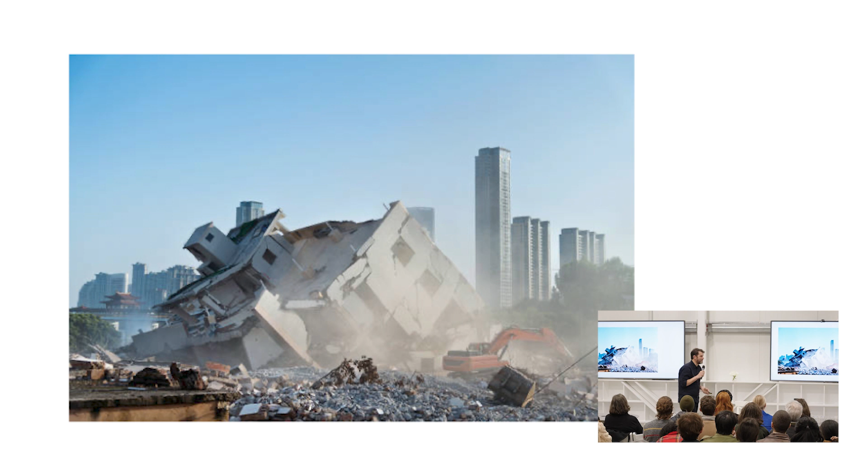You probably don't often hear engineers talking about morality. I think quite often we're facilitators for other people's visions, but I'm afraid I'm a little more opinionated than that. So we're going to talk about the social context of building design and engineering. People rather like engineers who design buildings that don't fall down. This is the primary driver for hiring an engineer to design anything. You might get an engineer because you want to be more economical with the material, make your building a bit more affordable. An emancipated engineer will combine art and physics to make structures really beautiful and lift your building. And after all, architecture is structure, or structure is architecture.

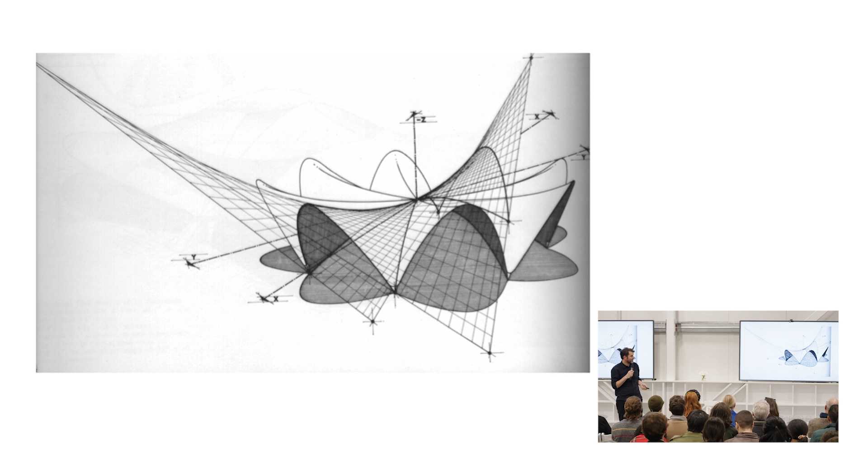But we try and think a bit further forward than that. What kind of employment are we creating when we're building buildings? Are we creating work for machines, or are we creating work for people? What kind of work are we creating? What kind of lives are we engendering by designing buildings the way that we design them?

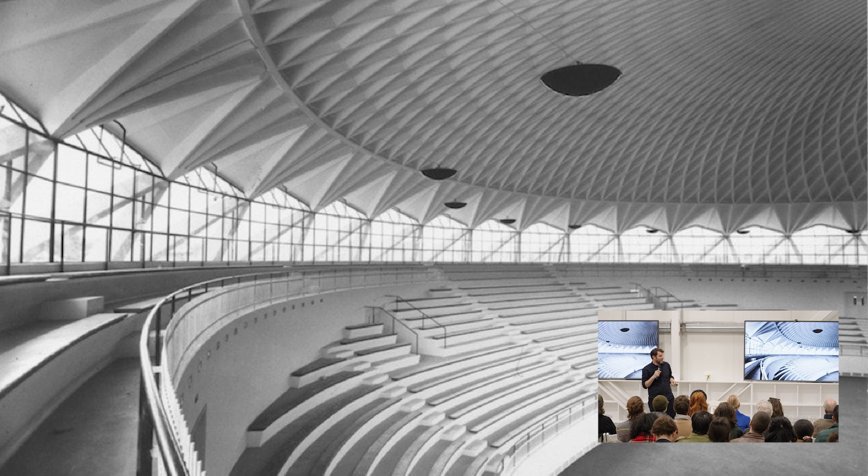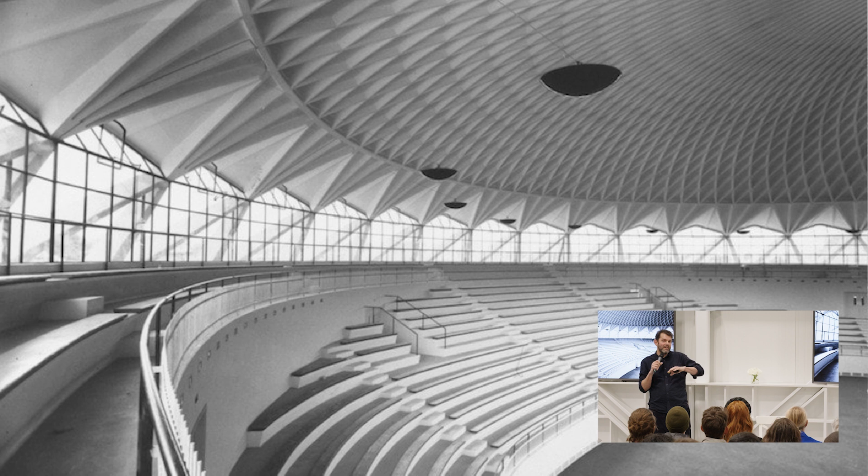In the 1950s, after the Second World War, there was a shortage of coal generally, and manpower was cheap and material was very expensive. So the kind of structure that this engendered, in this case from Luigi Nervi or Felix Candela in South America, Eladio Dieste in Uruguay, structures that are very highly designed, spending a lot of time designing them, a lot of time building formwork to minimize the amount of material.

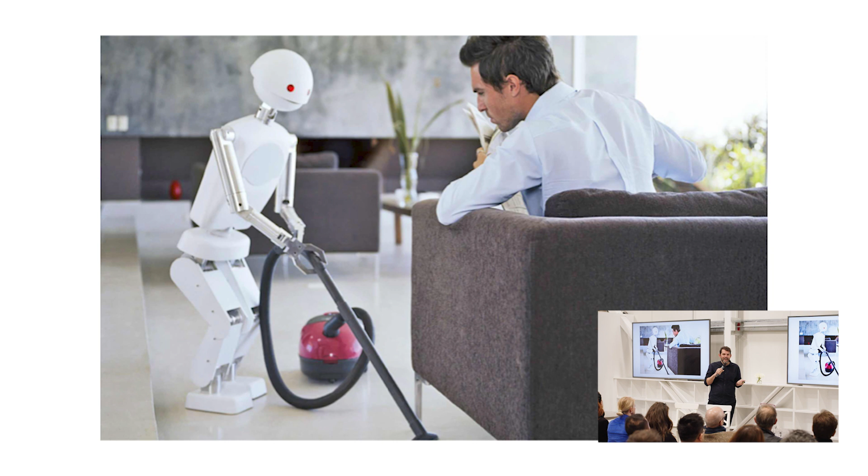We were kind of interested to think about the impact that income tax has on this equation. So you tax employment and you tax labor and design. You don't really tax material and machines. So in our society, we tend to over-rationalize, minimize design, minimize carpentry, formwork, and just chuck lots of concrete and steel at problems. CNC, everybody loves CNC. It's the future. Robots are going to make our lives absolutely amazing, but they're probably not going to make the lives of the people who used to do those jobs amazing. There'll be a lot of people languishing on universal income as a consequence. So how do we make decisions in the way we build that are good for society?

The construction industry at the moment is deeply steeped in the fossil fuel era. All of the materials we use, steel, glass, concrete, brick, they all come from coal-fired processes, and they use unimaginable amounts of energy compared to any amount of energy that was used before.

So when we're practicing, we design, in our practice, lots of steel and concrete buildings all the time, but we try to offer alternatives that we think are socially better than the ones that we normally use. And people say, how do you evaluate this? How can you understand what materials have high carbon or what materials don't have high carbon? There are lots of spreadsheets and websites to work this kind of thing out.

But for me, it's very simple. If there's fire in the process, then clearly it's a high carbon material. If there isn't fire in the process, then it isn't. So we're pushing generally to build more with timber and more with stone.

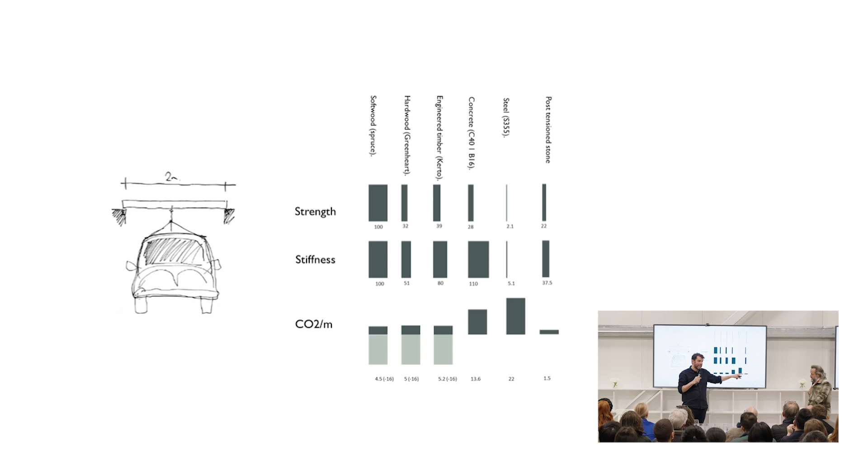These are the sections that have the same stiffness. These are the carbon footprints per meter of those beams. So it's about 22 kilos of CO2 per meter for the tiny sliver of steel, 14 for the concrete, 5 for the timber, and minus 16 if you consider the sequestered carbon in the timber, only 1.5 for the stone. And the reason is the stone is very strong. It comes straight out of the ground and it's already made.

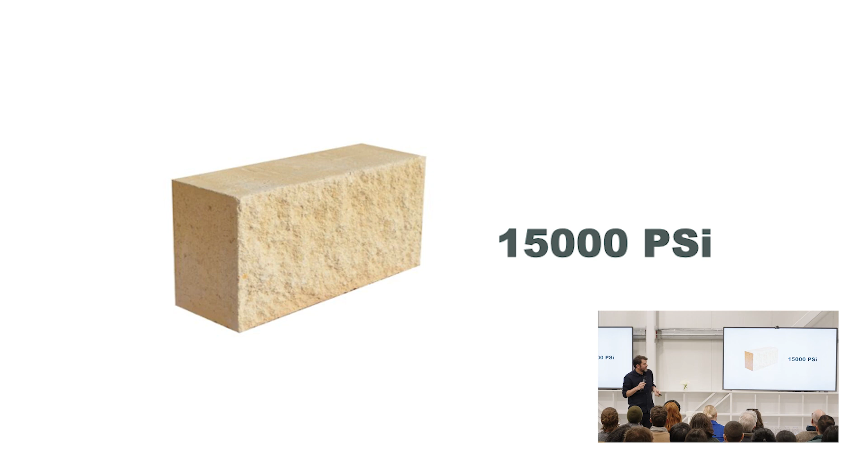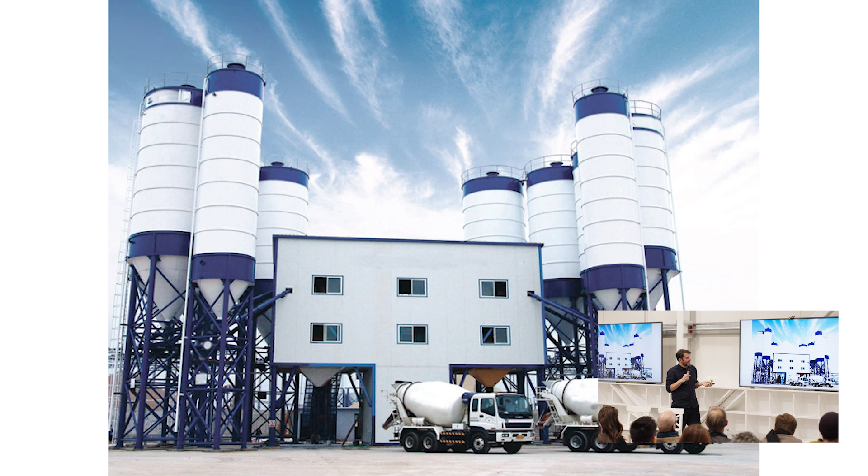We, in our incredible construction industry, take 15,000 PSI limestone, we crush it up, we get a lot of gas, we burn it, not only releasing the carbon from the gas, but releasing the carbon from the chemical process of making cement. We get fresh water and sharp sand, both of which are in short supply. We put up formwork, reinforcement, backpropping, vibration, releasing agent. 28 days later, we have a piece of concrete with a strength of 4,000 PSI. So we've thrown all these industrial processes at this piece of material, and we've rendered it with 1/5 of the strength that it had in the first place, which to me at least seems a little perverse.

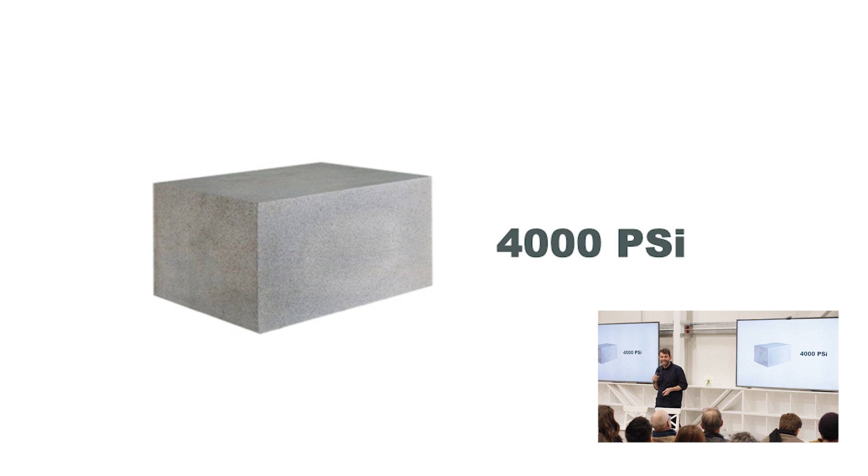There are probably historical reasons for that. People question, is stone sustainable? It's going to run out. Somebody asked me what's going to happen when all the stone runs out.

So we're going to be floating around the sun in office buildings and the earth will be completely consumed. Actually, impossible. 7 billion people having a chunk of stone this big is a 40 kilometer by 40 kilometer by 20 meter deep quarry. So the earth's crust has unimaginable infinite volumes of stone. And if you ever got close to exhausting the stone, a lot of new stone would come bubbling up out of the ground in its place almost immediately.

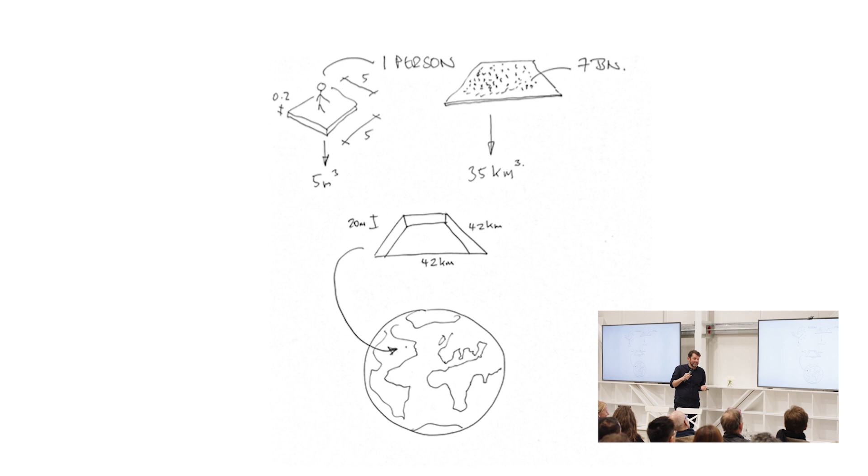So in some ways, we're harvesting geothermal energy to make a building material. The default solution to decarbonization of building is timber, and we were interested in land use. So the UK, obviously, we have very little land, and we like to build. Where are we going to grow all these trees?

So this is a tree, has about 1.5 cubic meters of material with, God knows what, 7.5 newtons per millimeter squared, which is pounds per something - maybe that can help, maybe he's bilingual in the units - but a small quantity of a very weak material over a 25-year period. So the tree takes a long time. Underneath the tree, 500 cubic meters of 150 newton material, much stronger, in about 3 months.

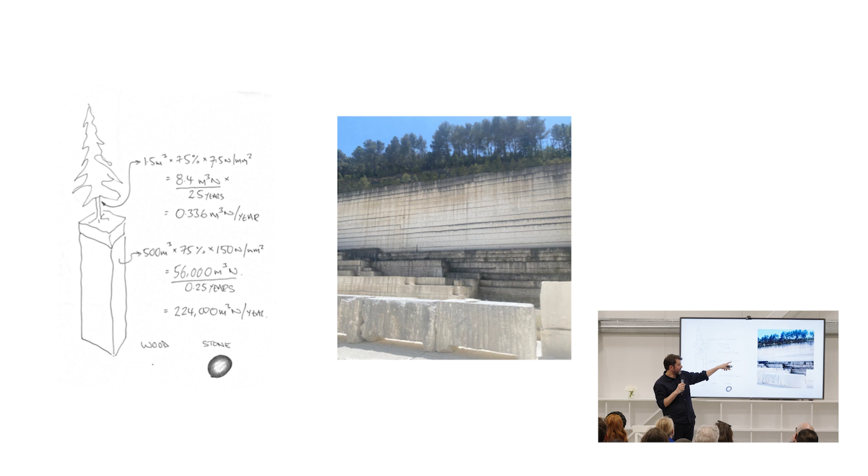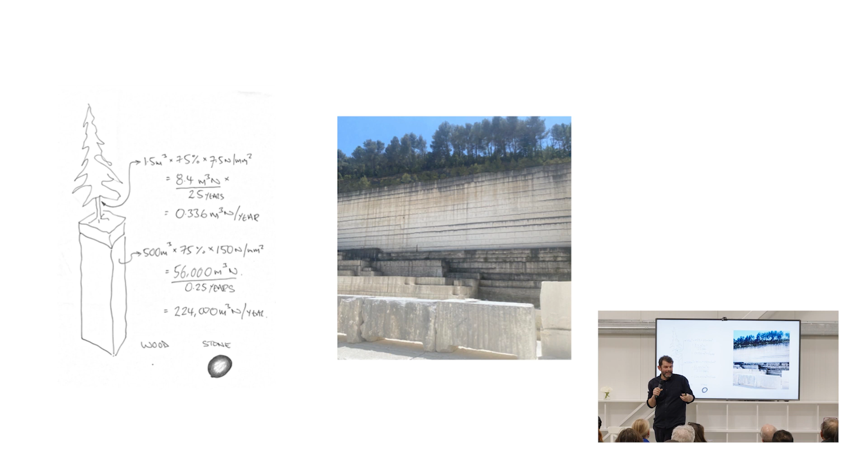And you can see this is the Estaillades quarry in the south of France. That quarrying is going to get you a lot more material than growing a tree on the surface, acre for acre. Stone is, as I said, much stronger than concrete in compression.

It's also stronger in tension, and it's also stiffer. So when concrete sets, it's got a lot of water inside. The water evaporates, and when you compress the concrete, you expel the water, so it has long-term shrinkage and creep behaviors that stone doesn't have. And because stone's stronger in tension, it doesn't need as many stirrups, links, and other kinds of reinforcement. So it's by far a superior material to concrete.

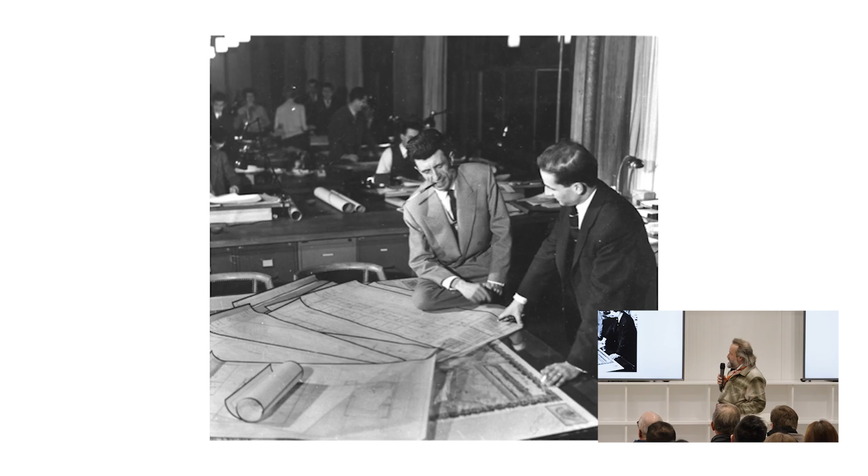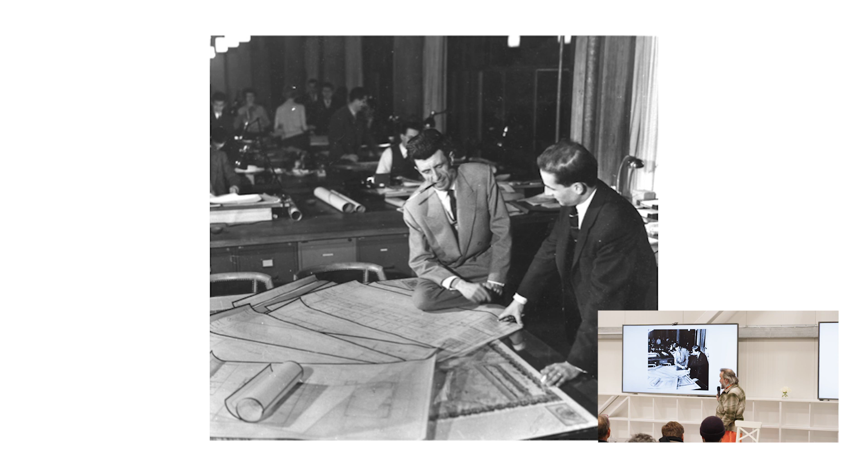So this handsome French architect is Fernand Pouillon. In the 1950s in France, straight after the war, 1945, France was on its knees. Most of the steel, most of the concrete had been used to reinforce the Atlantic coast. Our coal furnaces were just not working at all. If you wanted to bring some steel from Marseille to Paris, it could take you two weeks because the trains were not working anymore, bridges had been blown. And to reconstruct France with affordable housing, you need a material that you could get quickly and cheaply. And Fernand Pouillon decided to come up with the idea of rebuilding France with something we have a lot of, which is not genius, but stone.

Now you are going to do the conversion because I'm the stonemason, I don't do numbers. In the 1950s, the French government commissioned a study on the use of energy to see how we could build as quickly as possible. For 1 cubic meter of concrete, you needed more or less 225 kilos of coal—500 pounds. And to do exactly the same for a cubic meter of stone, you just needed 10 kilos. So quite a big difference in the use of the material.

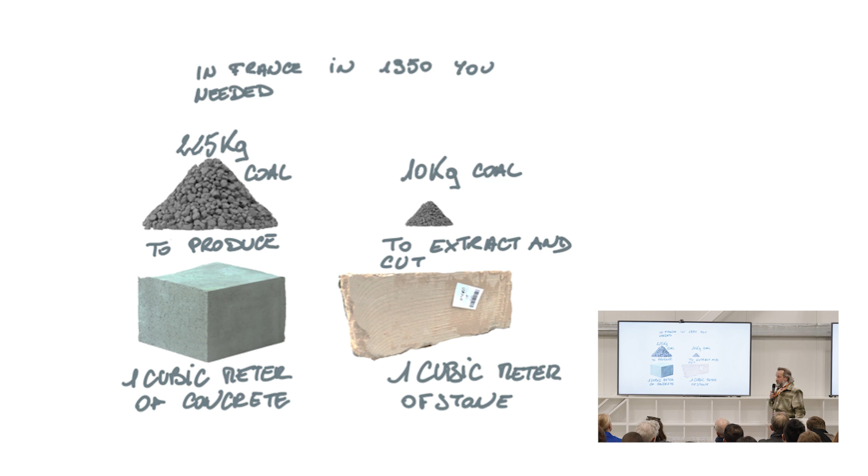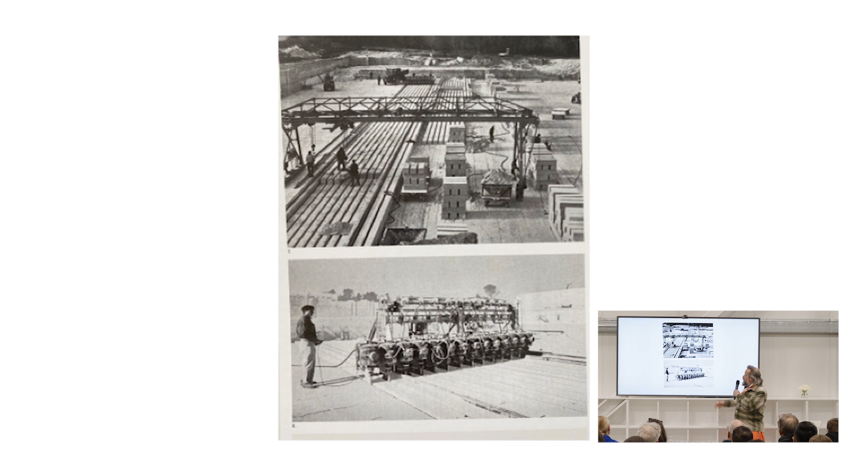So the French government, with some of the money from the Marshall Plan from America, was able to develop a new industry, a new stone industry based on heavy mechanized quarrying. Those quarries—if you were an architect building in Bordeaux or in Paris, you would have used the module that was available in that quarry, making the quarry work as much as possible. So the module was going to be different from the east to the west, to the north and south.

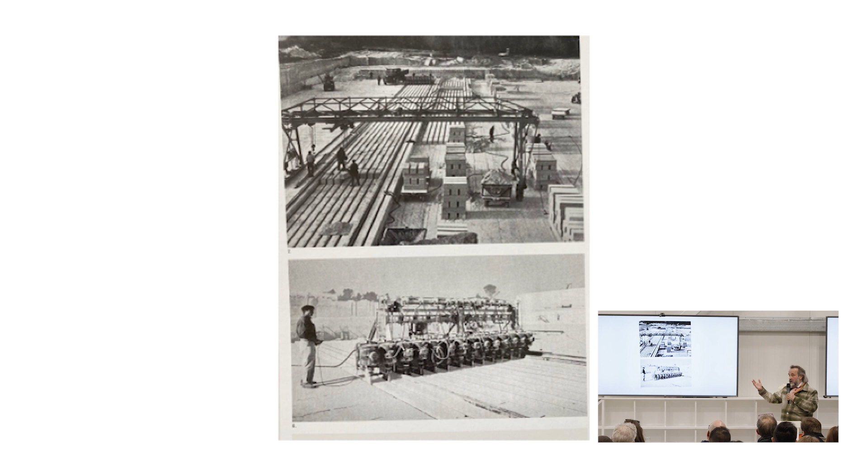Thank you. And Fernand Pouillon built those affordable housing projects—not Fernand Pouillon only, but many other French architects all over France, from 1950 to 1970. And it really, when we said it was the austerity—it's in England in the last 13 years, we had an austerity economy. And in fact, when you look at the two conditions, 1950s and now in England, you've got this age where energy has become more and more expensive, and the labor force a lot less affordable.

Sorry, if you can go one back, please. Thank you, you can go forward and back. Jesus, fantastic.

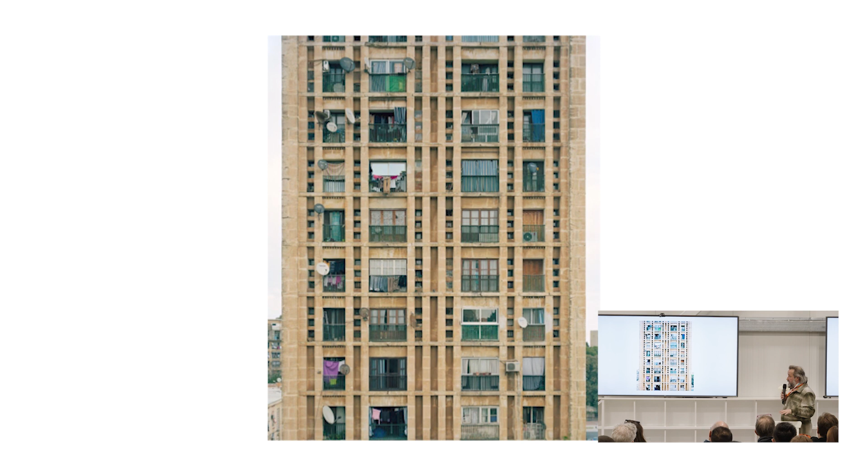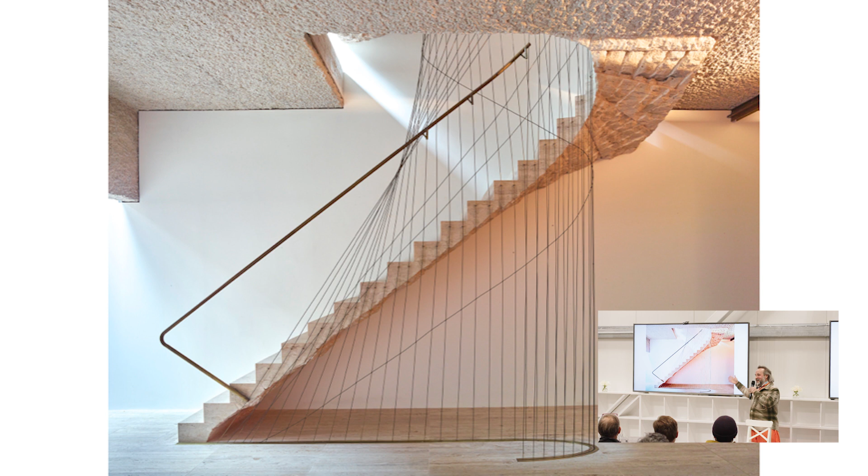We do staircases. So when Pierre and I met, Pierre was selling traditional stone staircases, and this is quite a traditional stone staircase. These staircases are typical all over Italy and Europe, and probably here as well. One stone sits on top of the stone underneath. We call them cantilever stairs, though they don't actually cantilever. The load trickles from tread to tread, and because the treads are fixed to the wall in the background, they stand up.

So we started to design those kinds of staircases, but Pierre could only sell flights of stairs to people who had a wall next to the stair. So we began to experiment with how we could design free-spanning stairs.

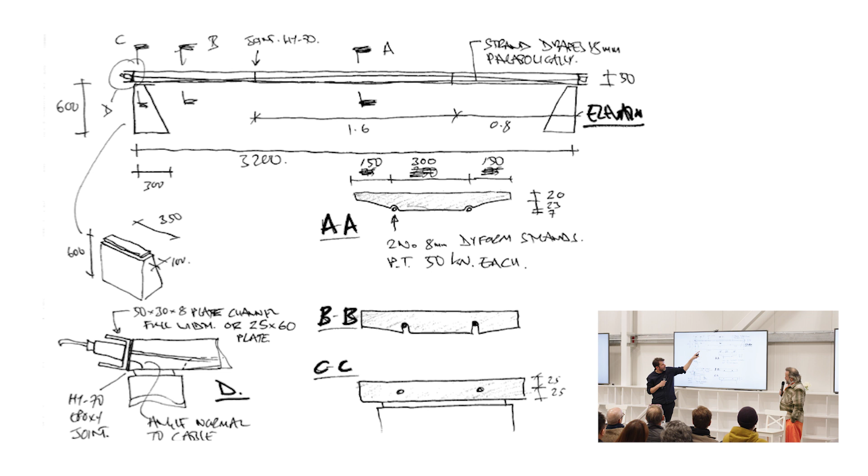This is an early prototype of a cable-stressed stone beam, 2 inches deep, 10 foot long, with 2 8 mm cables running through with 5 tons of pre-stress. The cables curve so that when they're stressed, they lift the weight of the stone and push the stones together end on end. We were better at designing stone beams than taking photographs, unfortunately, and now that thing is in the skip.

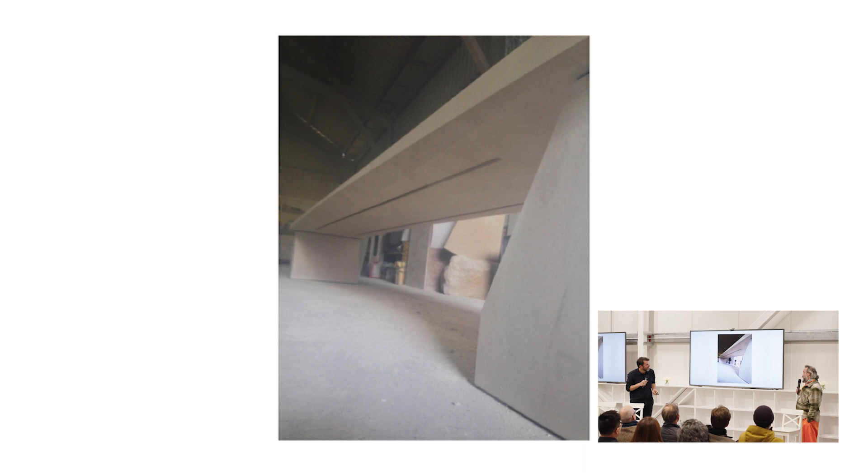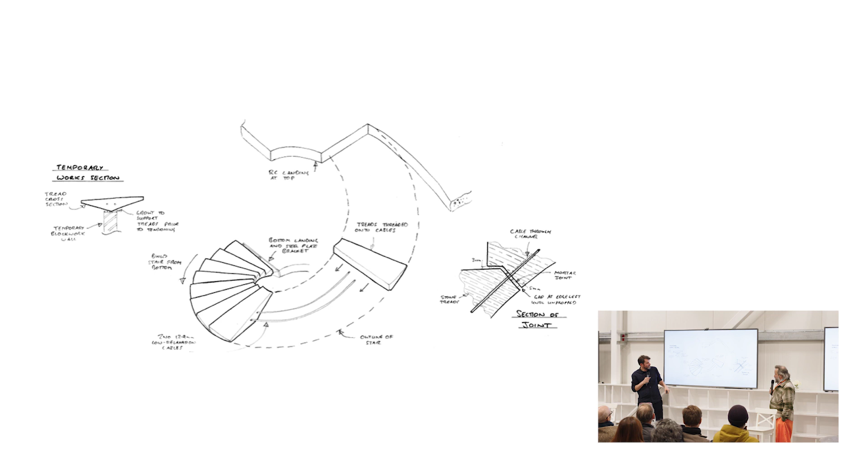We didn't have the budget, but we worked through and started designing, first of all, short, straight spans of staircases, then slightly curved helical spans, and then big helixes. It's a very succinct and simple solution - each tread is an individual stone, and the cables go through the middle and jam them together so we're able to make these structures. We did some prototyping, screwed it up, and eventually figured it out.

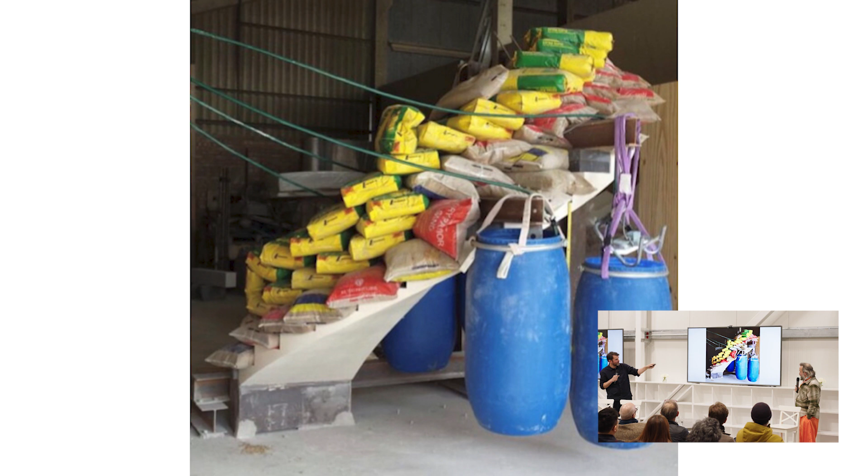This is Pierre's torture chamber for a staircase - the blue things are full of water. This was the first really big helical stair that we designed.

Again, you can see that it's shallow. The typical solution to this is to build a concrete stair or a steel stair and overclad it in stone. But you can imagine how many additional activities are involved in doing that, and how much additional cutting.

So I'm hesitating because I think we're out of order, aren't we? No, it's still good. Well, I'm not listening to you anymore, but it seems like I listen, no. Just you talk now. Okay. That's not mine, that's yours still. Yeah, still yours. Okay, so don't wake me up.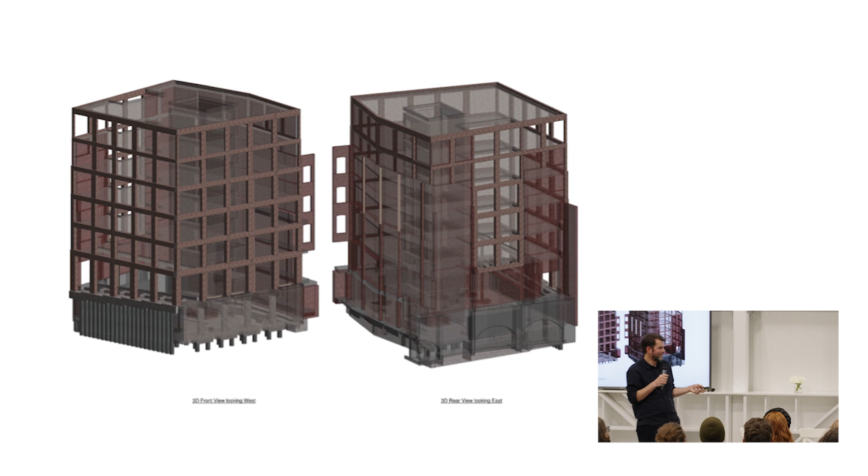People want audacious structures, but what we really want to do is build buildings. I wasn't out of order, sorry. Yeah, it's okay, I still know the building, so that's fine.

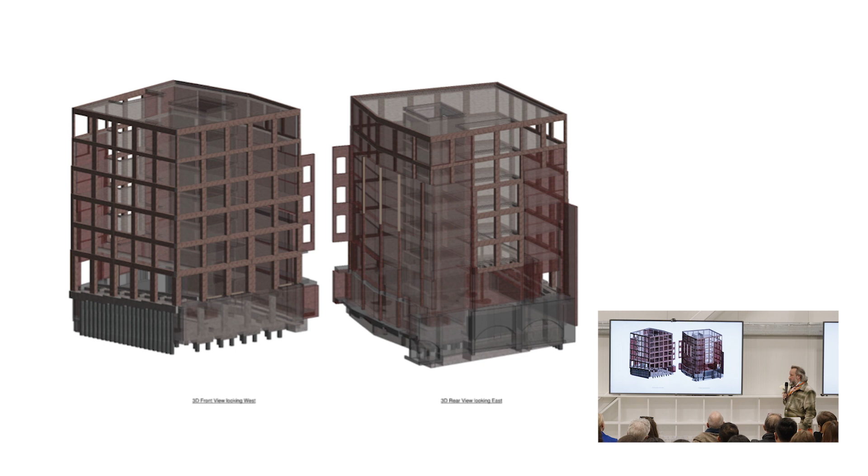So in 2016, you both sent us a commission to build a stone staircase made of solid stone blocks. It was going to be a brick building, but Amin decided to look into a more efficient way of building, using sustainable material like stone.

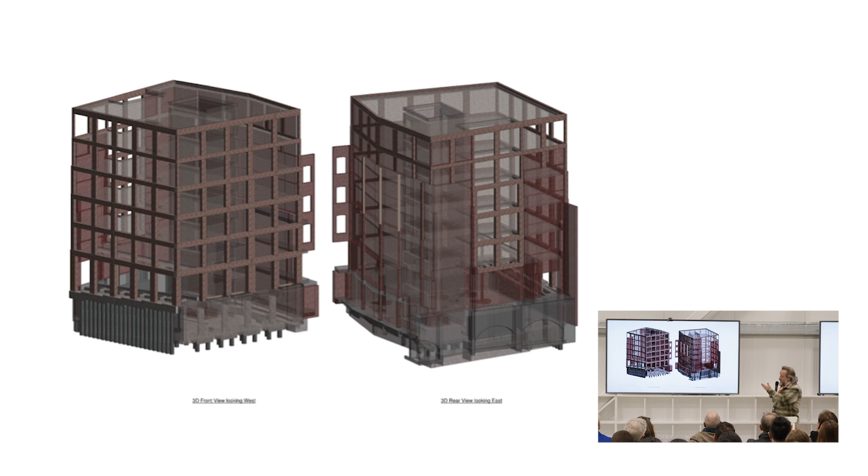Yes, so the system was an exoskeleton made of a succession of columns and beams which were attached by a connection box to the concrete floor. Do you want to explain the way it was built with the concrete floor, Steve?

So if the subcontractor was the same person building the stone as building the concrete, they would coordinate themselves and share hook time on the crane, and it would be really easy. But they're obviously not - you have stonemasons and concrete contractors. So in this case, we built the building's concrete frame on temporary propping. We left the temporary propping in and then built the stone afterwards, then took the temporary propping out at the end, so that you can separate the two activities and reduce conflicts on site.

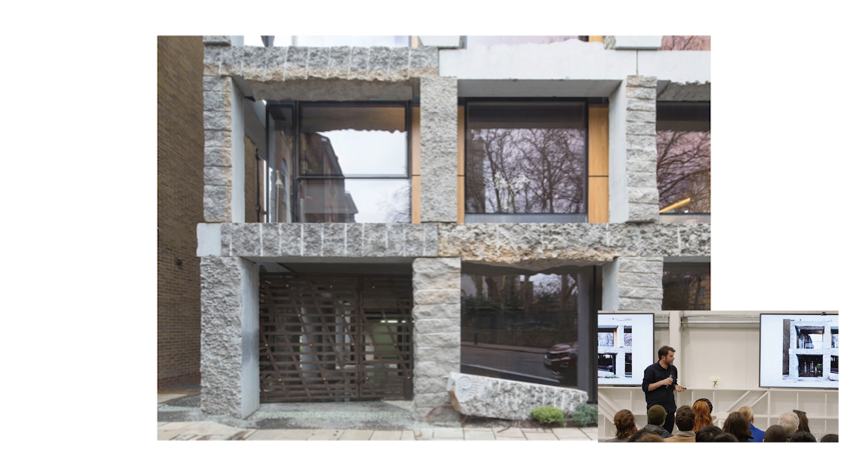Working on the same philosophy as Fernand Pouillon, Amin Taha decided to go for a very honest and raw finish to the stone. Again, to simplify the finishes and make the stone a lot more affordable, he decided to go for how the stone gets out of the quarry - so split, or just the raw crust of stone.

I think on the next slide we can see it. Maybe the next one, yeah. And you can see here that he decided to leave some what we call a sawn face, which has been cut by our big saws.

Again, this exercise was about economy of energy and efficiency. I think the next one... Okay, that's yours now. So what else can we make?

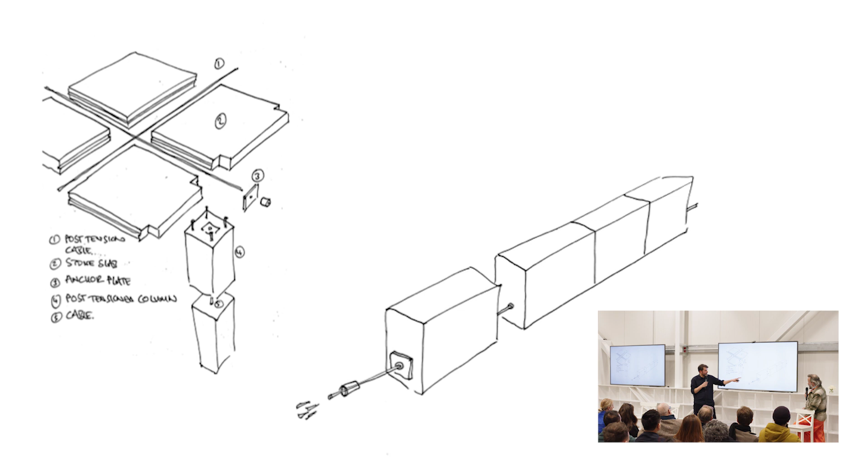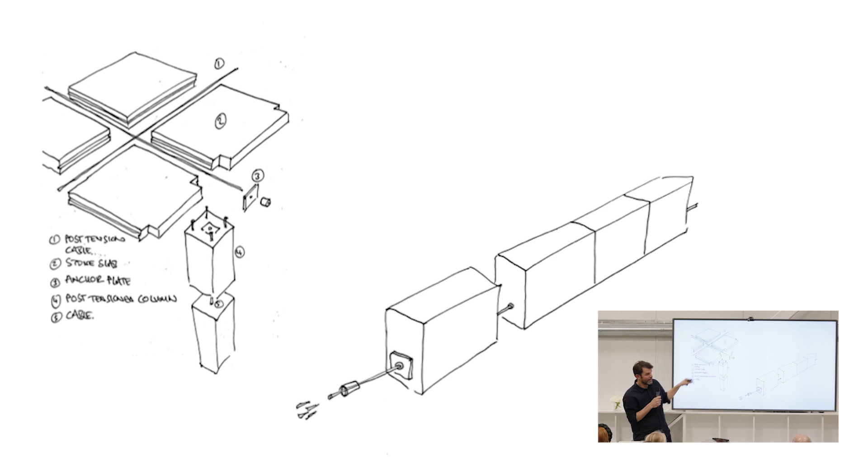The stairs are really complicated and very difficult to analyze, but simple beams and columns are very easy to analyze, and these are building components we can use anywhere. So we make standardized rectangular blocks, drill a hole through the middle, put a cable through the hole, use a cuff and wedges to hold the cable at tension, put it through with a jack, and make a beam. We can do the same thing with stone to make columns, and use stone plates with cables in between to make slabs. So you can make very simple building components with stone.

We have an R&D program in our company with an annual budget of about $1.50, increased to $2 since last week—we hit a big time. So we've been doing lots of improvised tests with Pierre and his team. Wendell in the middle is the head of special structures at University College London, and we're testing the beams for strength.

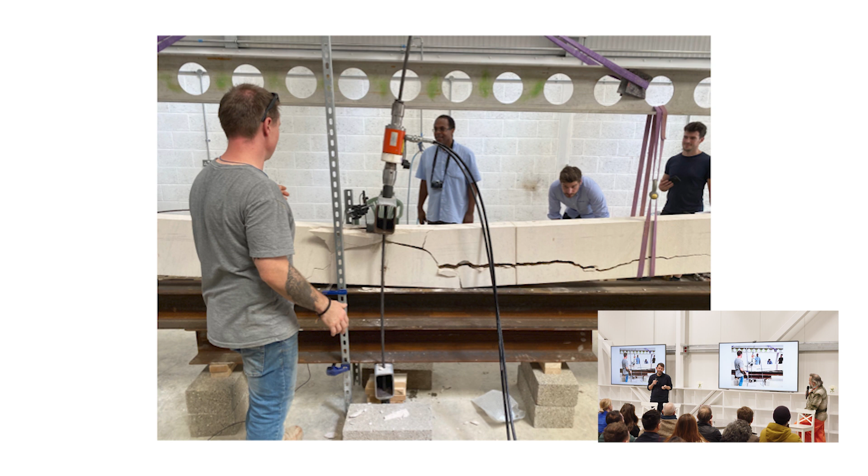Because concrete has water in it, when the water reaches boiling point it turns to steam and explosively spalls the concrete, exposing the rebar which melts and the beam falls down. You didn't get that with stone—it just sat there passively, and we got 3 hours of fire resistance from this beam in a 1,000-degree furnace. Very effective.

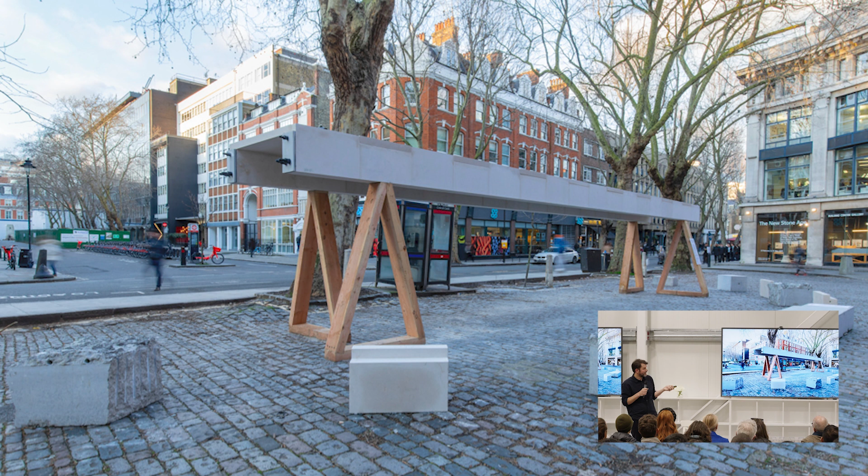This is not the first exhibition we've done. We did one at the Building Centre in London called the New Stone Age, and we were talking to a commercial developer in London about what they'd need for building components. They're building trading floors and saying they want 12-meter column-free spans, which I don't know what for. When you walk into a trading office, there's loads of meeting rooms and desks and that kind of stuff—I don't know why they need column-free.

Column-free is really bad for the environment—it takes a lot of energy. I think they clear the desks away and go roller skating at weekends or something. But anyway, this is a 12-meter span, 450 deep—1.5 foot deep, 8 inches wide—with 2 half-inch cables running through, and a 3-inch stone slab on top. So it's a useful, very simple building component.

This one you have behind you, so I don't need to point at it. Here we're trying to invoke a standard concrete T-section. What we have at the ends is recycled granite, recovered from a Pomo building. Granite's much stronger than limestone, so we're using it at the points of high stress.

In between is Portland roach bed. Portland is quite an expensive stone in the UK, but nobody wants the roach bed because it's kind of ugly and not the right color. So we got— Whoa! What do you mean ugly? Okay, that's limestone—beautiful, but people can't... Thank you, thank you, don't be judgmental like that. Stop heckling, it's not ugly.

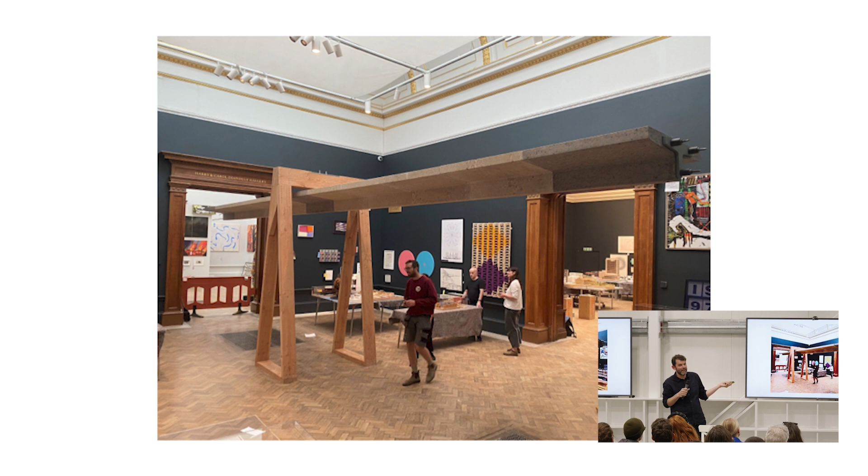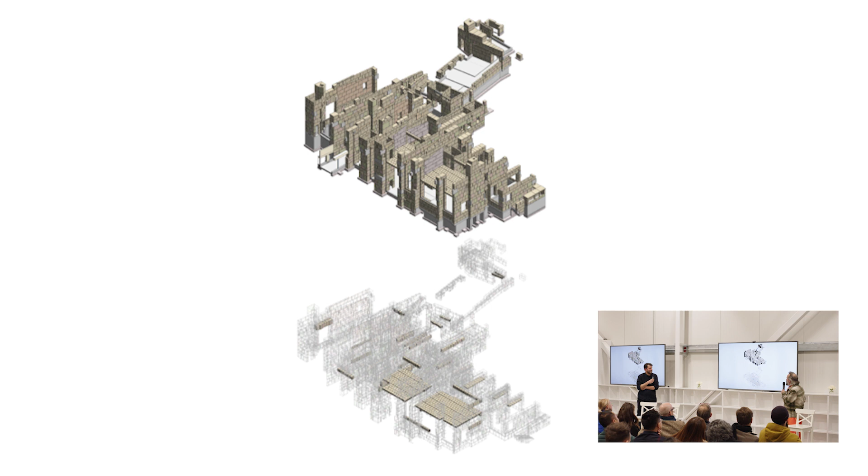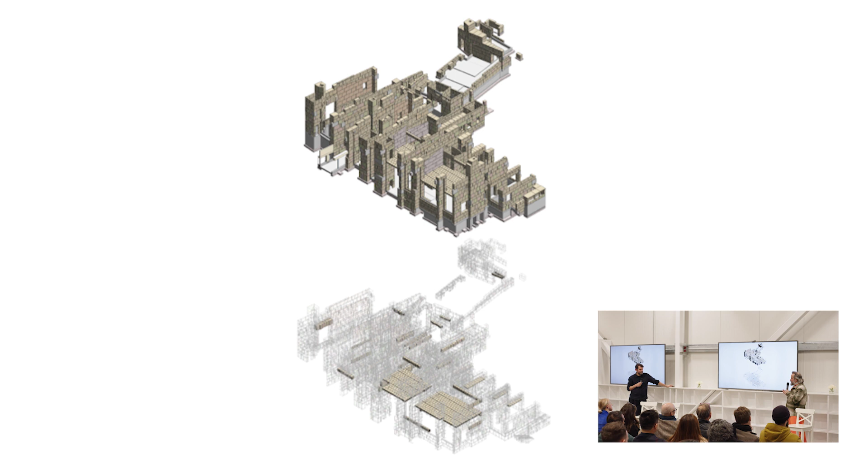Two years ago, we were commissioned to build a 3,000 square meter private house in England, and the aim was to be as sustainable as possible. The client wanted to use as little concrete as possible, and two materials came straight away—two materials that could be easily scalable in their use: CLT and stone.

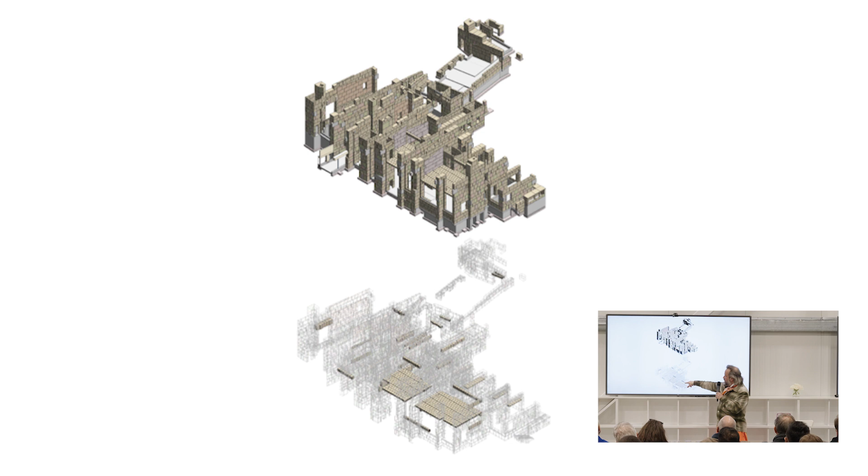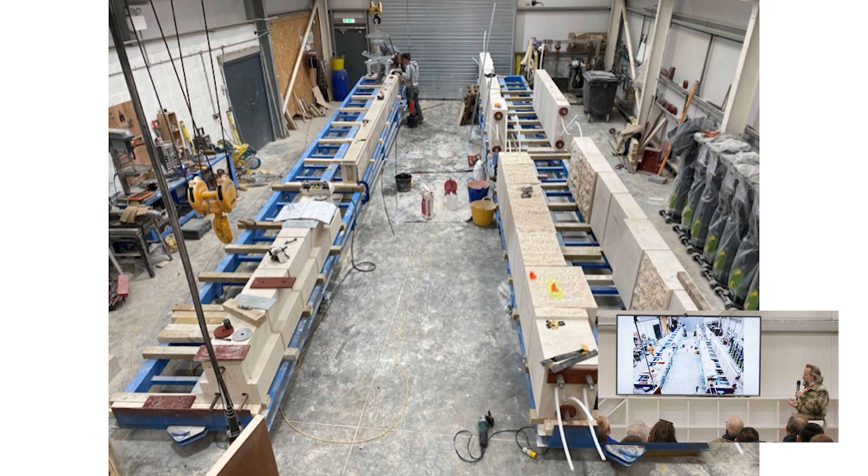Again, using the principle of large pattern stone modules to speed up the fitting process, but also including what we've been developing for the last 10 years—pre-stressed stone beams done off-site in our workshop, as shown in this transparent visualization. Here you can see one of our assembly lines where we produce such beams. We're trying to speed up the fitting process, much like the precast concrete industry.

Even architects in France now sell stone as natural concrete, just to make it a bit sexier.

The fact that a lot more finishes can be applied to stone. You've got split, you've got just left raw from the saw.

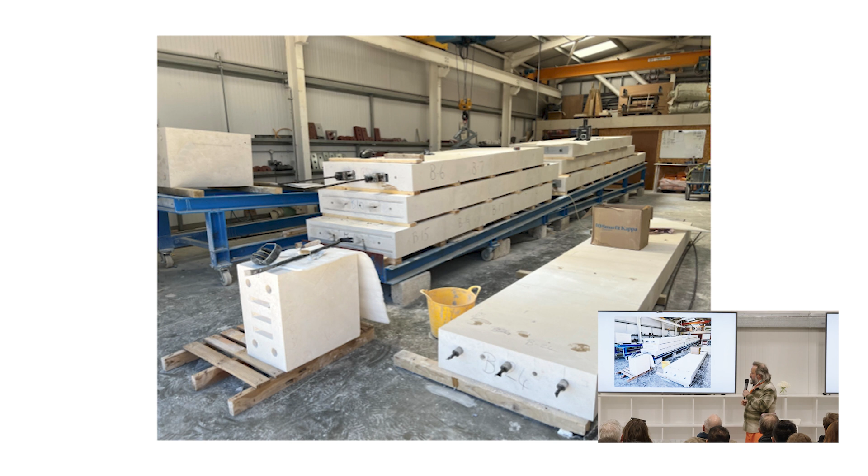The fact that we can produce pre-assembled elements means that on site the main contractor is less reluctant, because if you start to bring 30 stonemasons to fix one stone at a time, it's problematic for the logistics and strategy of building. Here you see some of the stone floor, with some of our cables that are used here.

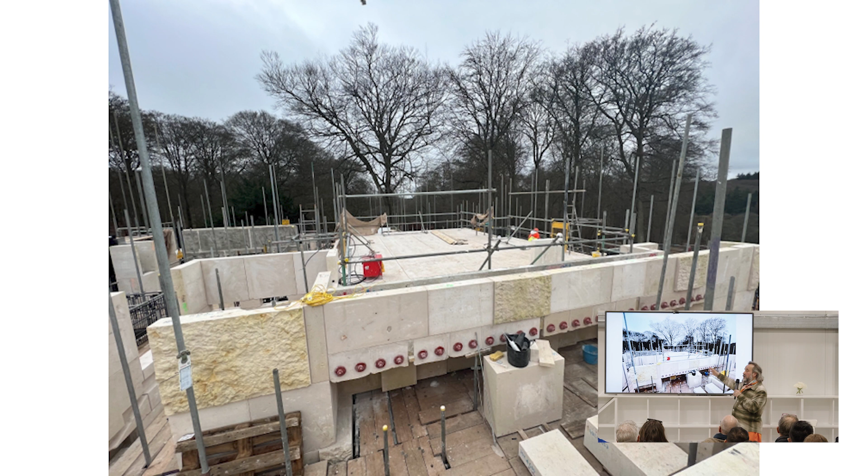And here you can see we've got a large area - I don't know how much fits in it, that's why I'm describing it as a large area. In stone, you can see the succession of stone slabs. They've been pre-tensioned, and here the whole floor - I do believe it's the first one in the world - this floor is all in pre-stressed stone.

So we're looking at other ideas and ways of using stone. In European culture, stone tends to be funicular, so we tend to use it always in compression, and it's never really used in tension. But in Indian culture and other Asian cultures, it's much more common to use it in bending and actually use the stone in tension, which we found very interesting.

So we were asked to do an exhibit for the Victoria and Albert Museum in London to look at an engineering principle, and we came up with this idea.

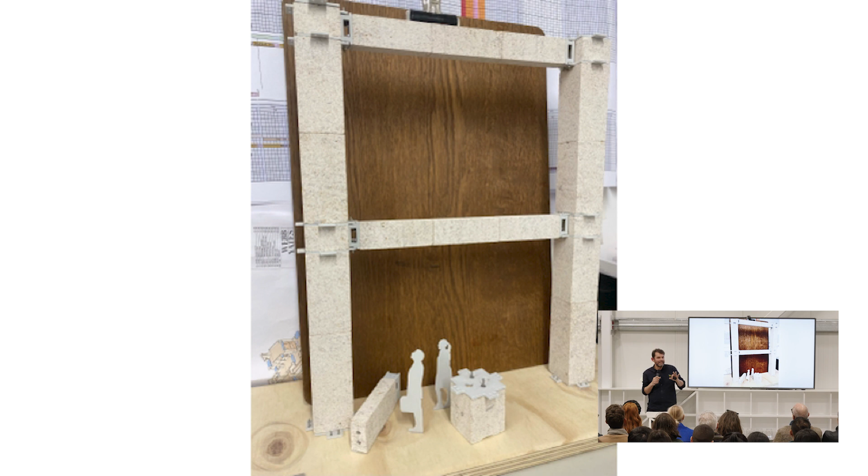But it's also to disturb as little as possible the general contractor's way of building. If you tell them that it's only a switching of material with easy connection, then they are a lot more open. It's less traumatic for the general contractors than suddenly changing all his gear, which understandably costs money. So we just propose to switch from a precast structure made of concrete to a pre-stressed off-site construction of stone members.

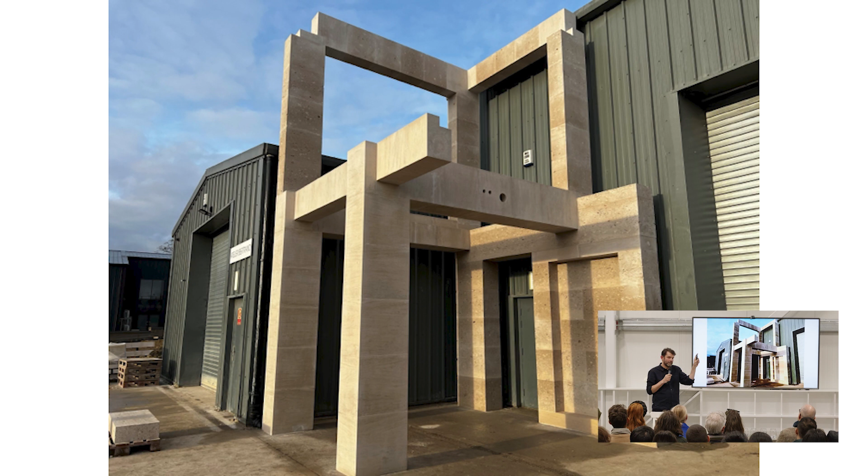So I don't think I've made this point clearly enough, but the beam above your heads, if that was a steel hollow rib beam, it would have 15 times more carbon footprint. So this solution or this kind of framing would be very, very powerful in decarbonizing construction.

And a bit - we sometimes forget that one of the first ways that concrete was used was for warehousing and very cheap offices.

Especially in France in the 1900s, when concrete was starting to be used, people were using it as a material for cheaply and quickly built warehousing.

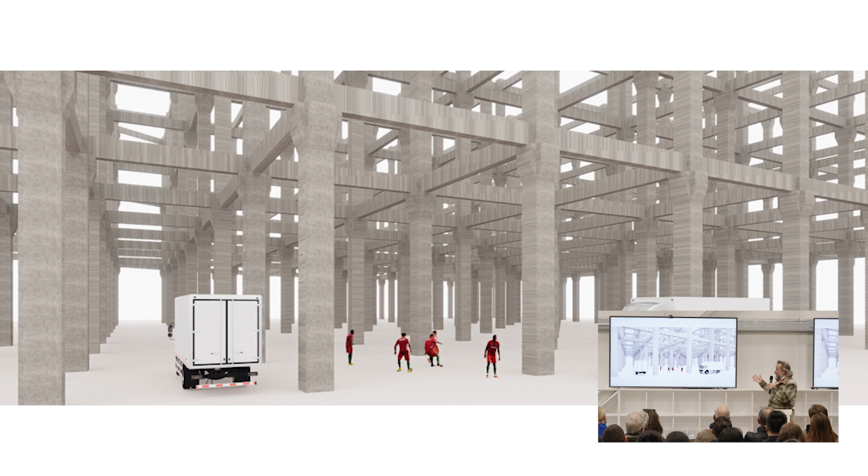And recently in the UK, with some new push by the government to build more sustainably, some urban logistic hubs have been asked to go as green as possible. Here, what we have is an urban logistic hub, all made of stone. As you can see, the size is quite impressive, and it will be a complete stone frame with CLT infill.

When we try to decarbonize construction in Britain, we tend to use CLT, cross-laminated timber, but that's a technology we're importing from Switzerland, Austria and Nordic countries where they have a lot of trees. We don't have that many trees either. The guy here was saying there are 7,000 spoken languages in the world. There should be 7,000 architectural languages, and they should all derive from their local surroundings. So I was thinking, we're importing solutions. What in Britain is our language?

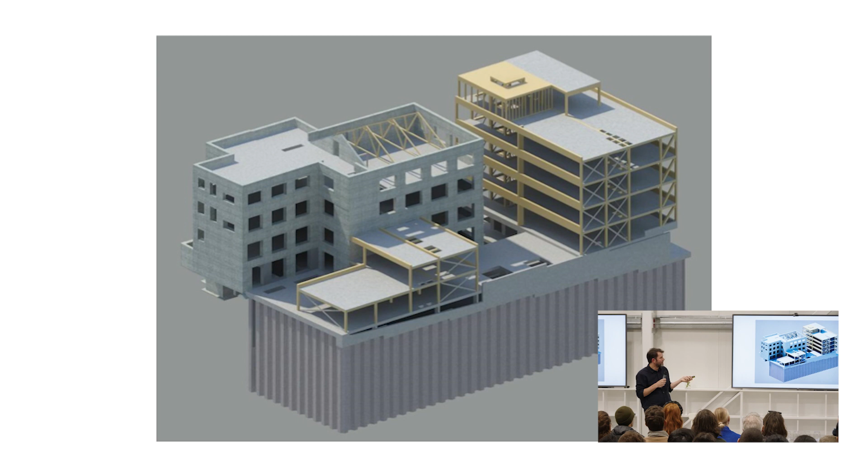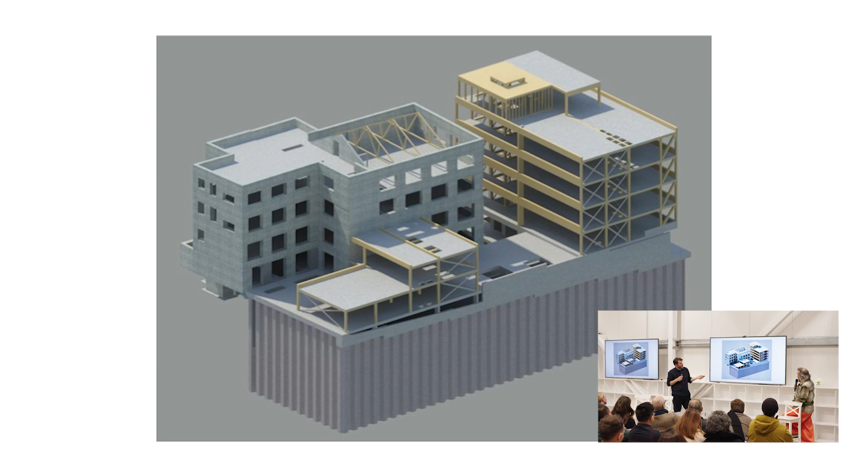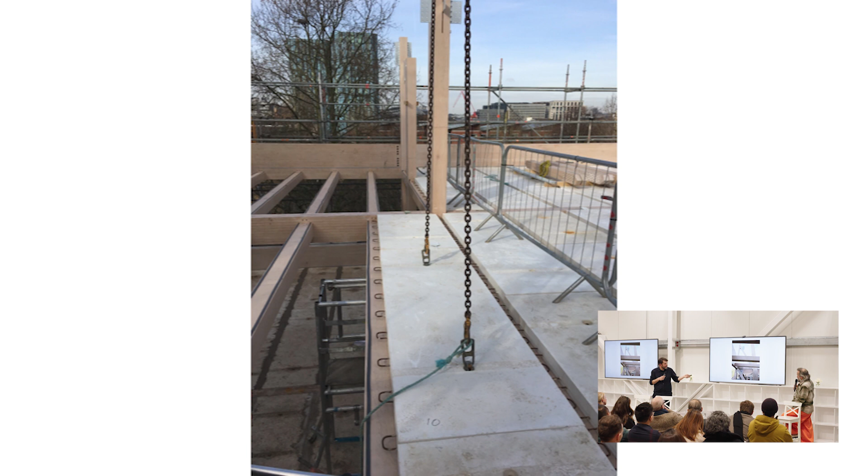So we have been designing buildings mixing high density materials for thermal mass with timber. Here we have a timber frame, quite a big timber frame building, with timber beams and thin concrete slabs. If you have that bit of thermal mass above the ceiling of the space, you don't need air conditioning - you can cool the space at night. The timber and concrete is fixed together compositely, so when the timber beams flex, they use the concrete to resist the flexure, and you end up with this exposed concrete and timber soffit.

The engineer's sketch allows them to hide mistakes because it's on scribbly bits. After that, they just scribble around and say, 'Oh, just do this connection here.' You look at the drawing and say, 'Oh, it's a beautiful drawing, that can only work.' And then when you go back to the workshop and look with the guy, you say, 'What have they done?' But it's still a beautiful drawing, Steve.

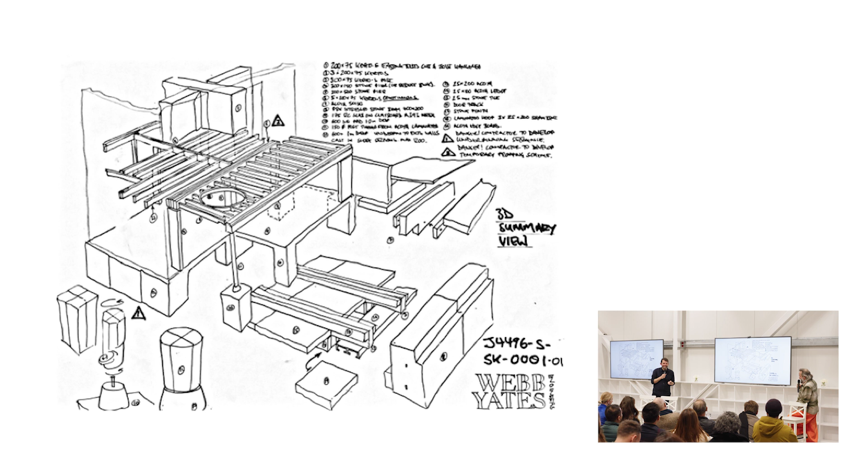Yeah, I take back what I said about CNC. Sometimes it's a really nice job to deal with craftsmen.

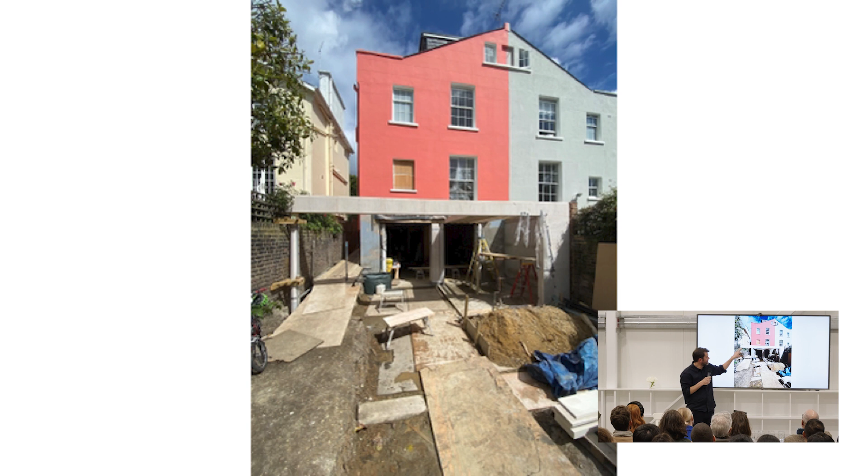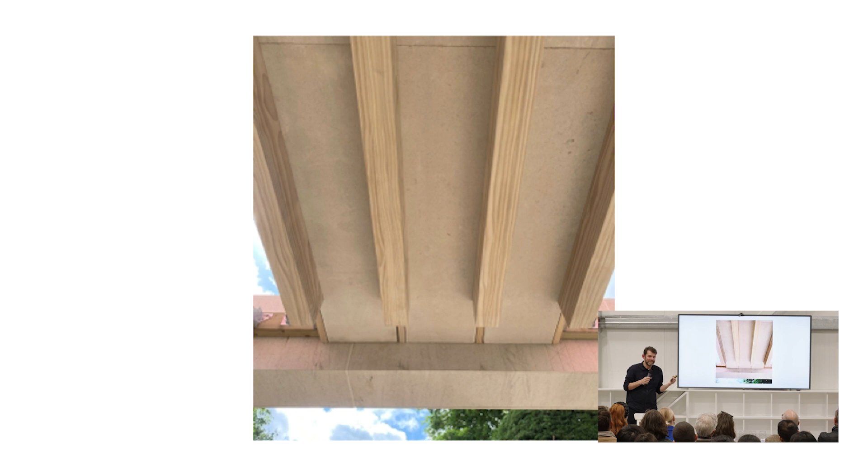So this is the one built, and these are my terrible iPhone shots of a site in construction. A post-tension beam for the long span, timber posts holding the post-tension stone up, timber beams, stone in between. For us, where we have just a little bit of stone and a little bit of timber, this kind of typology is great. And actually, it's acoustically quite good, good in fire, means we don't have to have air conditioning, and it's quite beautiful to look at.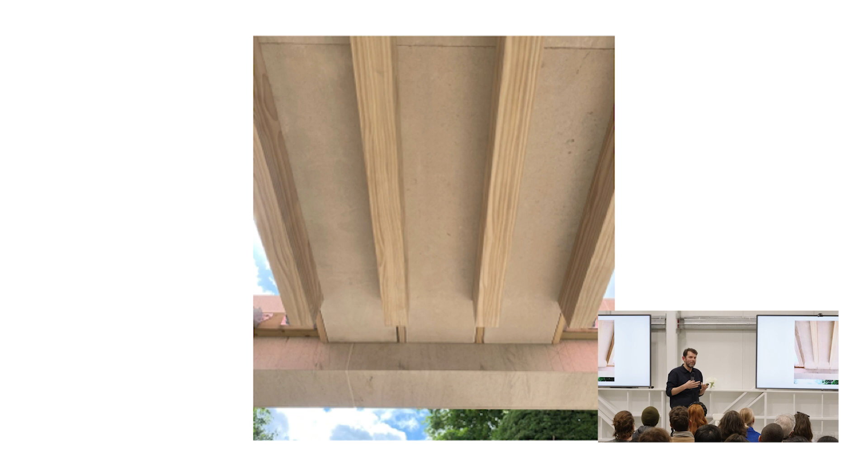And we find a typology that responds to our local context. Also, for quarry owners and stonemasons, it allows you to use some stone that wouldn't be used for flooring, for example, and can be used for this new purpose. By finding new ways of using the whole range of stone in a quarry, you make stone a lot more affordable than it is.

This is a proposal being developed at the moment for a hybrid residential tower. It's using the kind of henge-type facade load-bearing structure with timber floors on the inside. So it's timber and stone in combination on a really big scale. The stone deals with a lot of fire problems and is also the facade element. And this kind of building, if you consider sequestration of carbon, is a carbon negative building. So suddenly, building goes from being a primary cause of global warming to actually part of the solution.

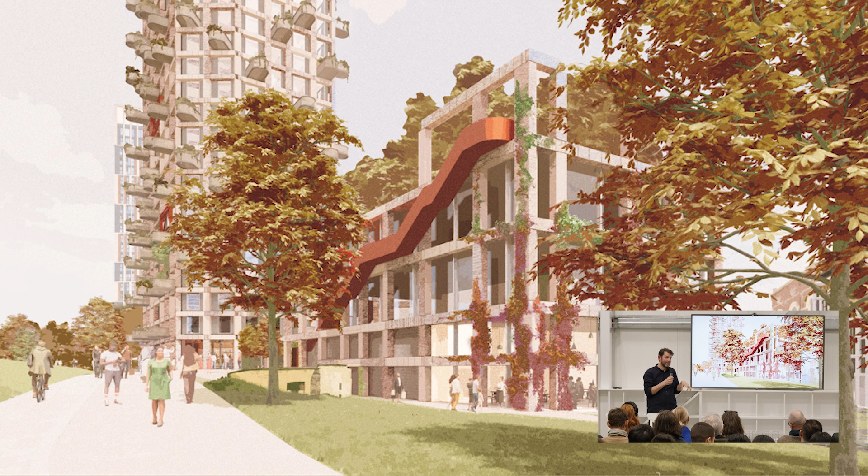Thank you. I think we should just stand because that's like a comedy routine you had going there. That was excellent. And I have to say, Steve and Pierre sent me their slide deck. It was like 85 slides, and I figured, no problem, I have nothing to do tonight because it'll take too long. But of course, you did it perfectly. So now I have to moderate.

I really appreciate both of you coming and giving this presentation together, because I think what's so important about this discussion and about the work you're doing, and the way we think about it—which we don't think about often enough in the world we inhabit, where everything is bifurcated into designer and builder and everything else—is how important it is for these collaborations to make this a success.

So without further ado, I do want to invite Jonah into the conversation, because I think a big part of this work is not only the design and fabrication, but the material. Steve, you put up an incredibly compelling slide about the carbon footprint and the amount of stone on Earth. So from someone who runs a quarry that really thinks hard about sustainability, take it away. What can you tell us?

So obviously we need to take stone out of the ground, and we're using, theoretically, a non-renewable resource. The stone is 150 million years old. It's going to take a while for that to come back. So as we take it out of the ground, we need to make sure we're using it in a very responsible way. And you need stone for a lot of things.

I mean, compared to concrete, we've got a small amount of knowledge. It's only 6,000 years that...